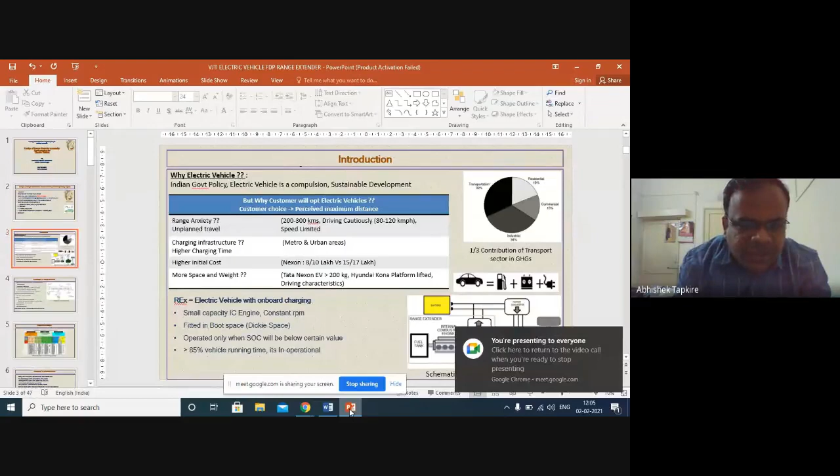Yeah, now the screen is visible. Presentation is visible. Yes sir, please make it large. Okay, now it is full screen. Yeah, it's good now. This symbol I am not getting. That's what I was confirming. Okay sir, so I will go to the first slide again.

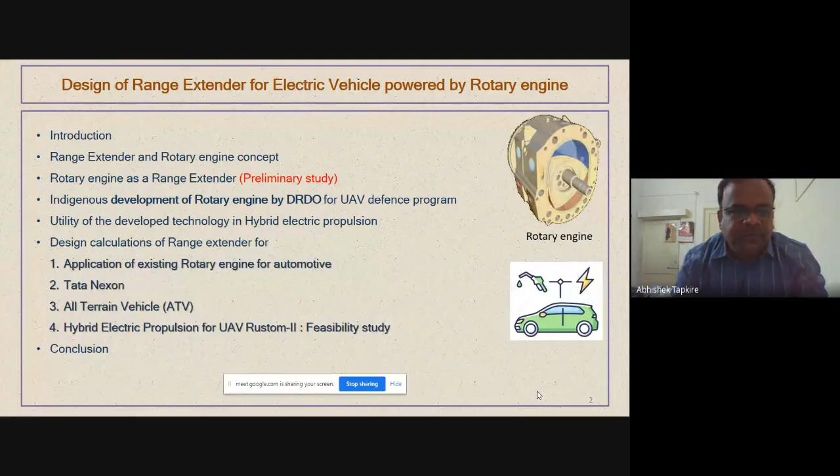These are the areas we are covering about development of rotary engine as a range extender in electric vehicle, and this is about the introduction portion which I already covered.

That range anxiety is why customers will opt for electric vehicle. The first one is about the range anxiety, and in case there is unplanned travel, the customer has somewhat apprehension about the electric vehicle.

The second, most important thing is about the charging infrastructure. The charging infrastructure currently in most developing nations is absent. Even in case of India, bidding and such things are going on, but the charging infrastructure is somewhat limited. Even the government is pursuing it very hard, but charging infrastructure currently is absent, and there is also a higher charging time.

And if you see about increasing the range of the vehicle, just like Tesla, they are going to near about 500-600 kilometers practically, or even more. In that case the initial cost of the vehicle is going to be somewhat high.

The reason behind is the battery cost is going to be very important, because in the electric vehicle near about 1/3 of the cost will be the battery cost. So if you are going for a higher range, the cost of the vehicle is going to increase.

Even in case of the Tata Nexon, the petrol and diesel version is available near about 8 to 10 lakh, while the electric version goes to near about 15 lakh. Even though we have a limited range in this area, if we go to increase the range, then battery cost is going to be very significant. That is going to be an issue.

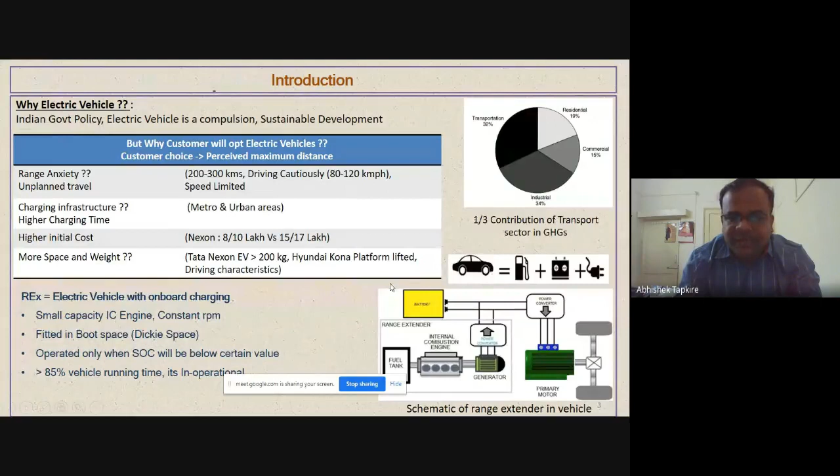The difference is, in a series hybrid vehicle there is no provision for external charging; here the plug-in charging will be there. Secondly, in a series hybrid electric vehicle the engine will be continuously on; here the engine will be on only when it is needed to increase the range of the vehicle. So we can say that fuel combination, battery combination, and external plug-in combination, all three will be available for the range extender configuration.

As I already told, it is a series configuration, so in this case we can limit the electric range of the vehicle. Suppose currently we are getting near about 200 to 250 kilometers of electric range. In that case, most customers will utilize this range, particularly in terms of personal cars.

Once or twice in a month, more than 150 kilometers of range will be utilized in a day. So what can be the alternative? Near about 125 to 150 kilometers of electric range can be given to the vehicle, and in case the vehicle range needs to be increased, suppose near about 300, 400 or 500 kilometers for a long journey, then after 150 kilometers this engine will be started, and it will charge the battery and supply it to the electric motor.

That will be electric drive. So most of the 85 to 90% of the time we are going to utilize the electric portion of the vehicle during its entire life course, and near about 10 to 15% of the time this range extender plus electric combination will be used.

The reason behind this is that there will be less dependency on the charging infrastructure, because we have the engine with us, and the customer's apprehension about range can be eliminated. Secondly, the cost of the vehicle can come down. Mahindra and Tata are also working on range extended electric vehicles to make this electric vehicle affordable in an economical segment.

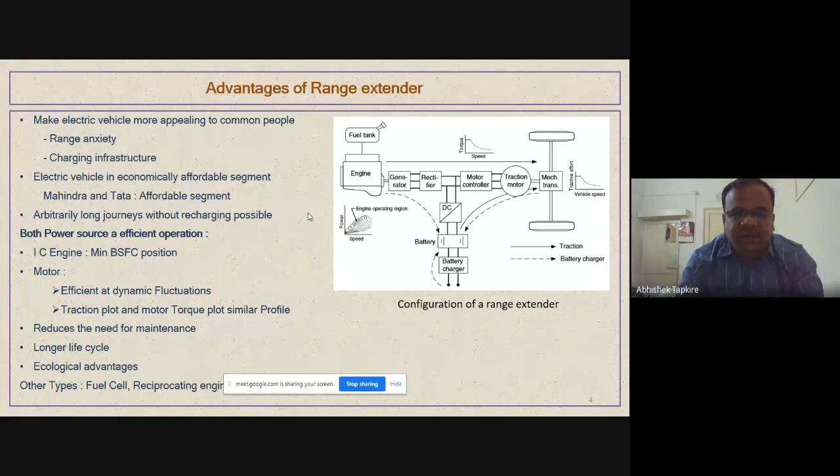Then there will be a reduced need for maintenance. Electric itself has lesser maintenance, and the engine will have lesser maintenance because its utilized life will be very less, giving a longer life cycle. It will have good ecological advantages, in terms of disposal of batteries, because a lesser battery capacity is required. Secondly, the engine will only be operated 10 to 15% of the time, considering customer characteristics for a personal vehicle, so we're getting the advantage both in terms of engine and electric vehicle side.

That is going to be very fine, but we have the disadvantage in terms of initial cost. So until the charging infrastructure is there, and until there's some good technological breakthrough in battery technology, the range extender is going to be a somewhat feasible option, considering the customer perspective, where it will be available in the economical range also, and we're getting the advantage of both electric and ICE engine benefits utilized in this range.

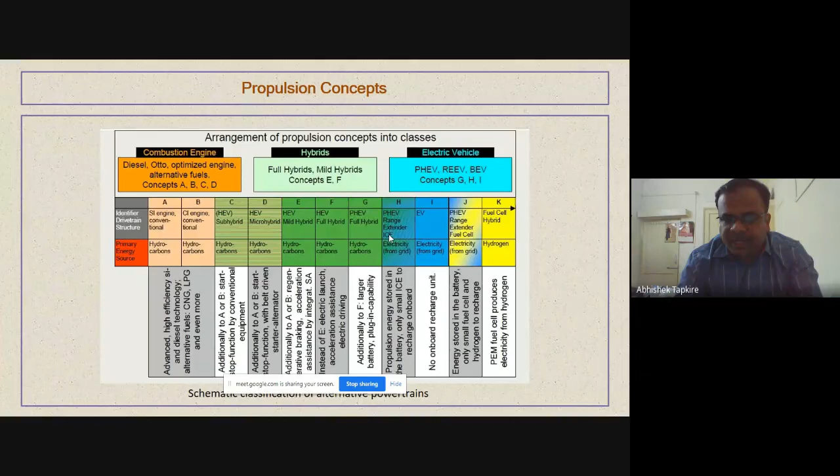So instead of directly going to the electric vehicle, the in-between range extender ICE engine option is available, where the plug-in option will be there and engine plus electric motor option will be there. Now we have seen the advantages of the range extender. What will be the limitations? We can say that it will be a lesser efficient mode because we are converting power twice.

But it will not be a very much lesser efficient, just like 35%, 30 to 35% in terms of ICE engine. The power plant propelling the vehicle, the sizing of the power plant will be decided by the vehicle.

Then increased running cost to some extent, because total in terms of 85% of the time the electric mode will be there, so we are getting the advantage of electric mileage. But when engine and electric both will be operating, in that case, at about 15% of the time the running cost will be somewhat on the higher side.

Then it is adding somewhat design complexity to the powertrain, even though it is going to be somewhat simple because we're adopting a series hybrid electric configuration. The maintenance and reliability aspects will be somewhat on the higher side because we're adding an engine, and the refueling has to be done at petrol stations and recharging at home or public charging. Both recharging and refueling we need to do.

But whatever the limitations are there in terms of range extender, the advantages are much more important, and the advantages outweigh the disadvantages.

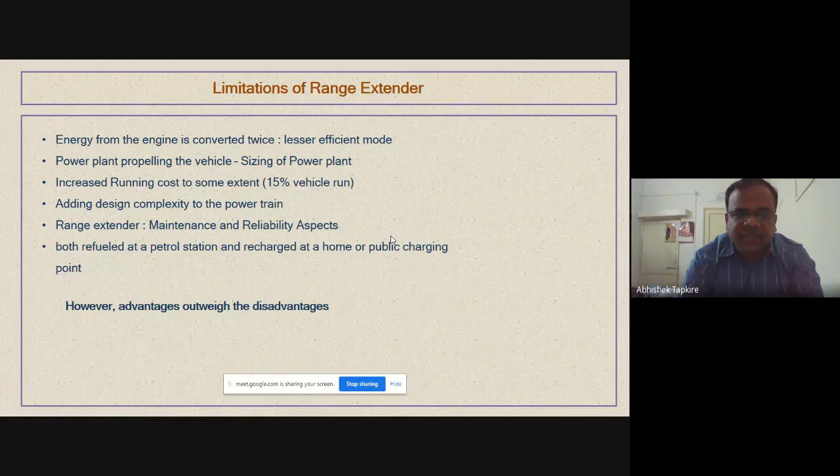If we see about the customer perspective, I already explained that generally the perceived maximum trip distance is going to be an important criteria. Suppose one person is staying near about 150, if you consider the example of Mumbai also, near about Pune, then near about distance is about 120 to 150 kilometers. If to-and-fro distance is there, 300 kilometers is going to be consumed within a day.

This condition is going to come once in 2 or 3 months, but it is affecting his purchase decision based on this perceived maximum trip distance, because charging infrastructure in between is not available.

Secondly, from the ecological perspective also, from the customer perspective point of view, if a range extender is there, then there will be a boost to electric vehicles, electric plus this range-extended vehicle, because in case he just wants to increase the range of the vehicle to near about 400 or 500 kilometers, that is going to be possible. And from the ecological perspective also, this is going to be important.

Then one more important thing is that the range extender has to be gasoline only, and there is more boost to the gasoline option currently, considering the emission point of view. The reason behind using the gasoline engine is the pollution limitation of the diesel vehicle.

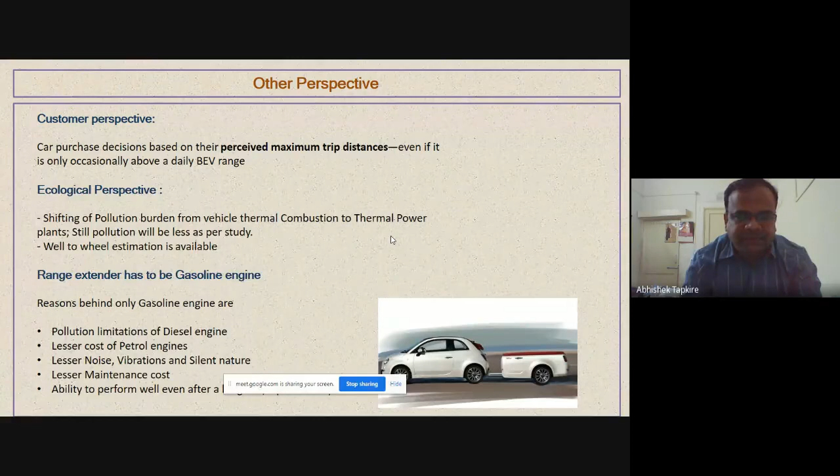Then what are the other options available is about the fuel cell. Fuel cell has the important advantage in terms of zero emission. Hydrogen has calorific value near about 3 times that of petrol and diesel, near about 1.2 lakh kilojoule per kg, and low weight, unlike a battery vehicle. But it has limitations currently in terms of technology, safety, storage, and availability of rare earth materials.

Reciprocating engine is also an important option as a range extender because of its high proven trust, and its 120 years of established technology. And this is about the trailer configuration.

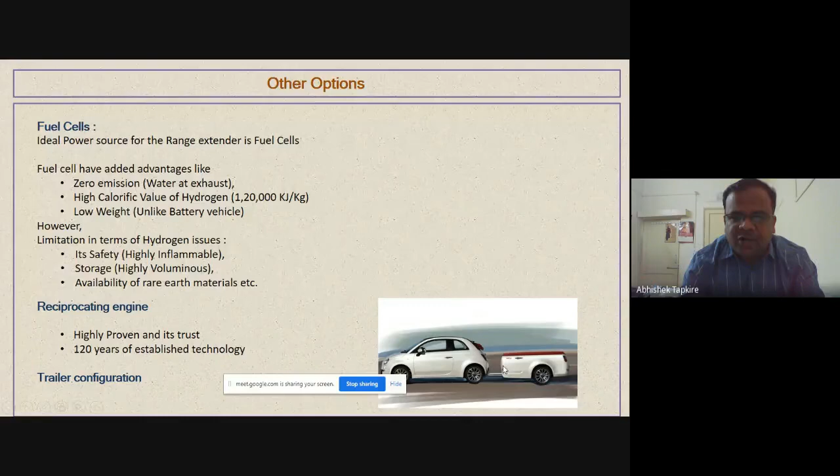If you see on the right side, such type of things are currently being tried in Europe, where the electric vehicle—this will be a pure electric vehicle—and in case the customer has to go to a higher range, particularly near about 400 or 500 kilometers, which is beyond the electric vehicle range, then such type of trailer configurations they are currently adopting, but this is not going to be very much feasible in the Indian scenario.

Sir, is my voice and all that coming through all right? Vijay, sir? Yes, sir. Yes, sir. Fine.

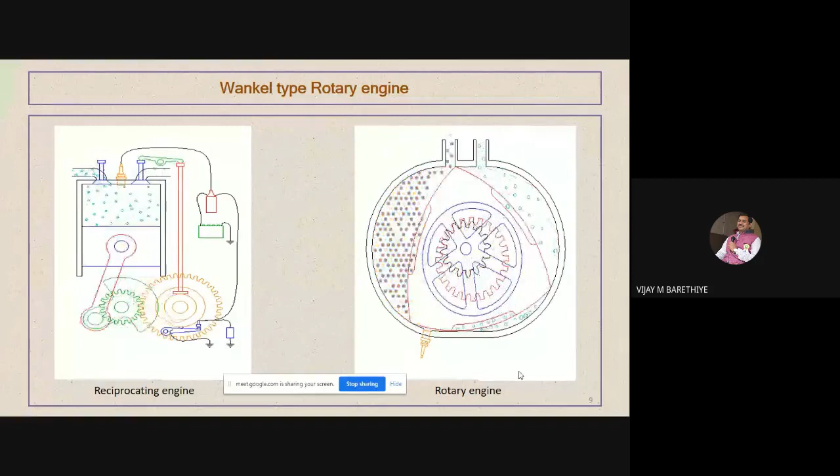Is any participant there? Jaipal Patil, sir. Thank you. Yeah, this animation is visible, right, sir?

Okay, this is the configuration of the Wankel type rotary engine. Here you can see this is a typical reciprocating 4-stroke engine, and this is a Wankel type rotary engine. The Wankel type rotary engine has a configuration where there is a triangular shaped rotor, and there is an epitrochoidal shaped housing.

This is an epitrochoid, and there is an internal epicyclic gear train. This internal epicyclic gear train has a 2:3 ratio, and it gives 1:3 output. That is, when there is 1 revolution of the rotor, there are 3 revolutions of the output shaft.

This is the area where suction takes place. Then there will be compression. Then the spark plug will fire at near about 18 degrees before top dead center. Then there will be an expansion stroke, and an exhaust stroke.

Here you can see that the complete thing is rotating. There is no conversion of reciprocating motion into rotary motion. Here directly the rotary motion is converted into rotary motion. So that has the advantage in terms of balancing, and also in terms of compactness, because the configuration itself is very compact.

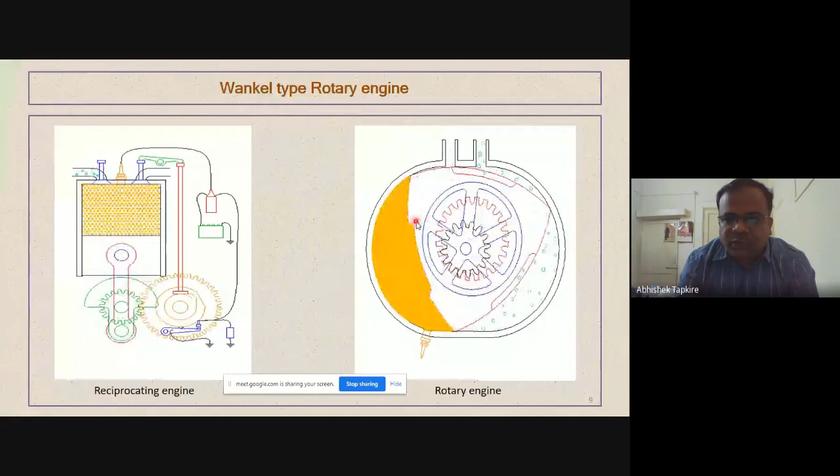Secondly, if there is 1 revolution of the rotor, there are 3 revolutions of the output shaft. You can say 3 revolutions of the output shaft is 360 multiplied by 3, which is near about 1080 degrees, and in this 1080 degrees, 4 strokes are taking place. So 1080 divided by 4 gives 270 degrees.

So each stroke in the rotary engine is about 270 degrees, whereas in the case of a 4-stroke engine, it is 180 degrees. So each stroke in the Wankel engine is 1.5 times larger compared to the 4-stroke engine.

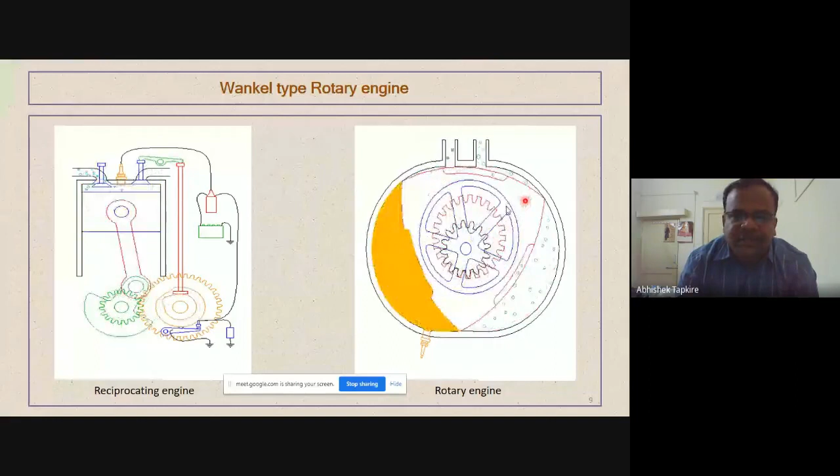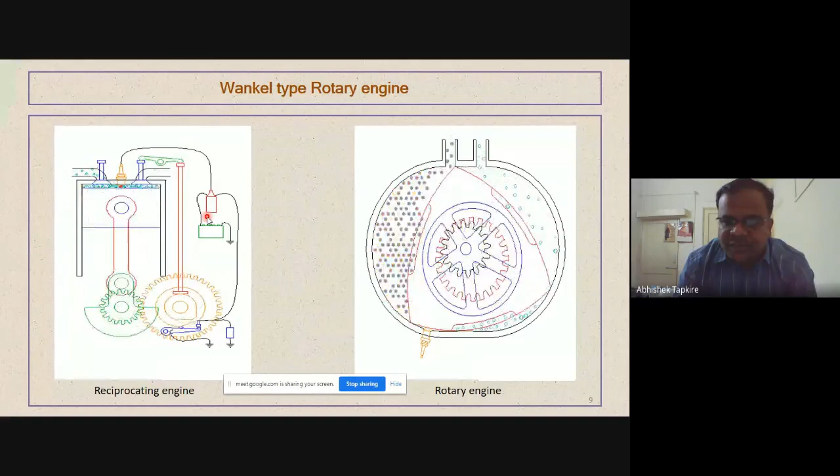So we're getting the advantage in terms of volumetric efficiency. Apart from that, we're getting the advantage in terms of torque fluctuations. So these are the important advantages of the Wankel engine.

Then, because of this mechanism itself, we're getting a high power to weight ratio. It has a low frontal area, so its specific weight is going to be very high, and specific volume is going to be very high.

Then it has lesser vibration and noise, because we're converting directly rotary into rotary motion. It has high volumetric efficiency, because as I already explained, each suction stroke is 1.5 times larger, so we're getting more time for induction of charge.

There will be smooth operation, and less complications. There is no valve train required as a port mechanism, which we currently use, and this is quite efficient also in the case of the Wankel engine.

Then the number of internal reciprocating parts is quite less compared to the reciprocating engine, so the power loss due to internal friction will be less. Then it is a gasoline engine, and it has silent operation.

So for long idle time operation, it is going to be very much useful. And I would like to say this technology is indigenously available with DRDO. DRDO has developed this technology for unmanned aerial vehicle applications.

There are 2 unmanned aerial vehicles of our Indian defense, that is UAV Nishant and UAV Panchi. For this UAV purpose, this technology has already been developed, and it has been delivered also for utility.

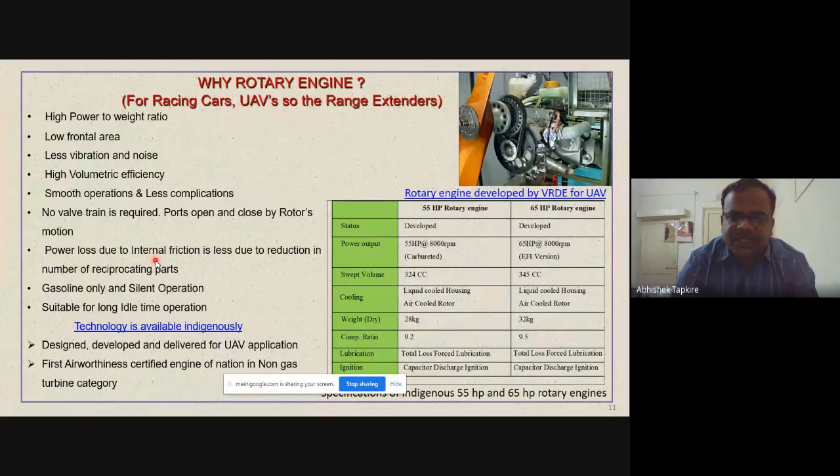And I would like to say this is the first airworthiness certified engine of the nation in the non-gas turbine category. In the gas turbine category, engines are available, but in the non-gas turbine category, this is the first airworthiness certified engine by the Center for Military Airworthiness Certification.

There is a regulatory body for Indian defense aero applications, that is CEMILAC, and this engine is certified by them.

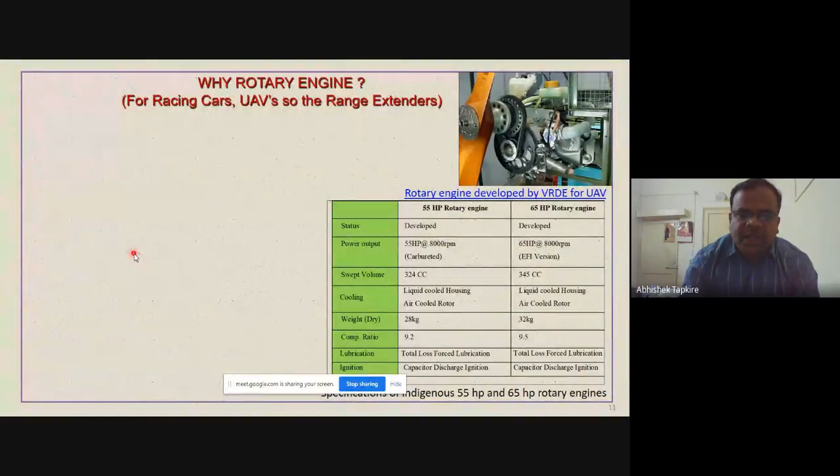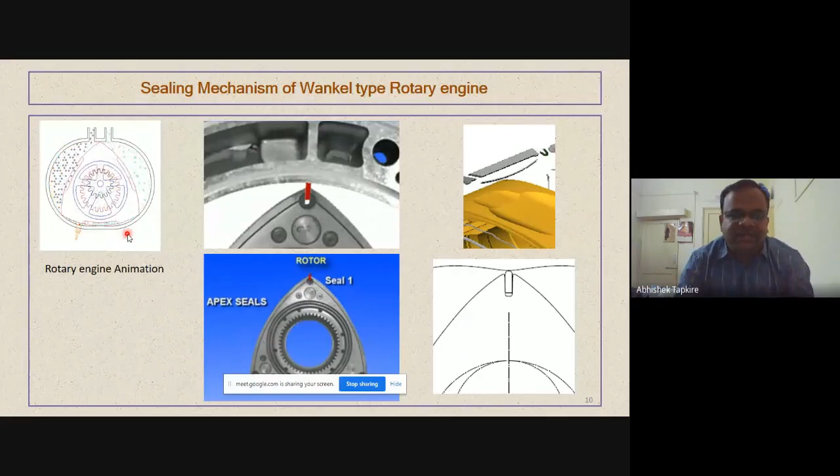There will be a separation of the chambers, so that different strokes take place simultaneously in different chambers. Here when there is suction, simultaneously expansion is going on, and combustion is going on, so different strokes are taking place simultaneously in different chambers.

The technology currently developed by DRDO has the capacity of 55 HP and 65 HP.

It is running at a higher RPM, that is 8000 RPM. It's a one carburetor version, and an electronic fuel injection version is also available with us. Its cooling, if you see, is liquid plus air cooling. Both are available - the housings are liquid cooled and the internal portion is air cooled.

If you see about the weight, particularly the weight, I told about the power to weight ratio. Its weight, if you see, near about 55 HP engine is having 28 kg dry weight, and 65 HP engine is having 32 kg of weight. So about 0.5 kilogram per horsepower we are getting, which is quite an important advantage as a range extender electric vehicle, because we require higher specific power - its weight has to be low and its volume also has to be low, while we should get higher horsepower also.

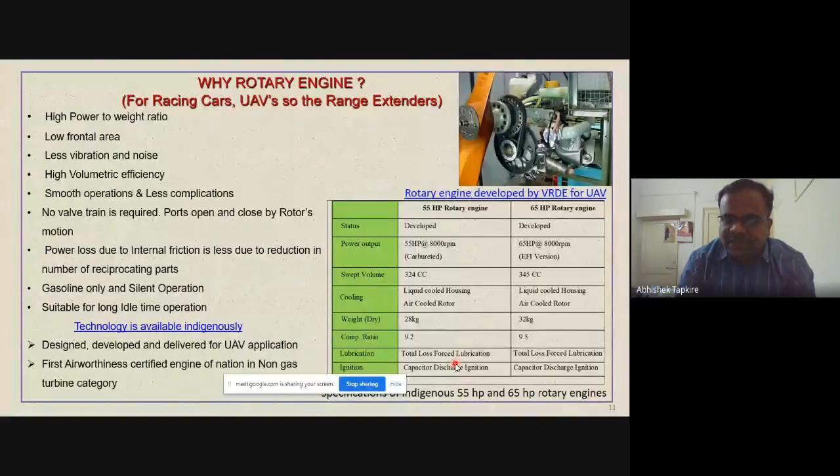So that's the compression ratio. The compression ratio is 9.2, 9.5. It's a gasoline engine. We have used a total loss forced lubrication system and CDI ignition system in this engine.

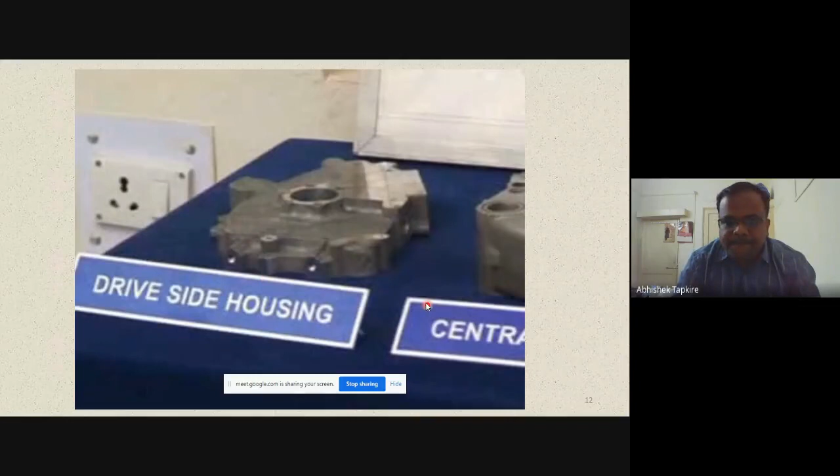So this is about the presentation. Yeah, this video is there. Now I think I would like to show the video at a later stage, because it's in presentation mode and I think it's not running. No issue - regarding the development of the vehicle engine, I would try to run the video at the end.

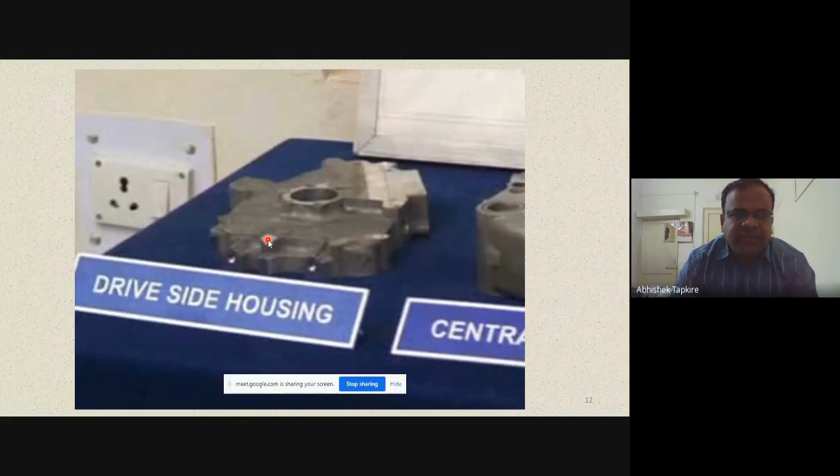The engines currently we have developed, we have also given to the UAV application. There are flight trials, high altitude trials, and other trials also we have done. It's a proven technology in terms of UAV, and the same technology can have an important utility in the range extender. So now the feasibility study was carried out.

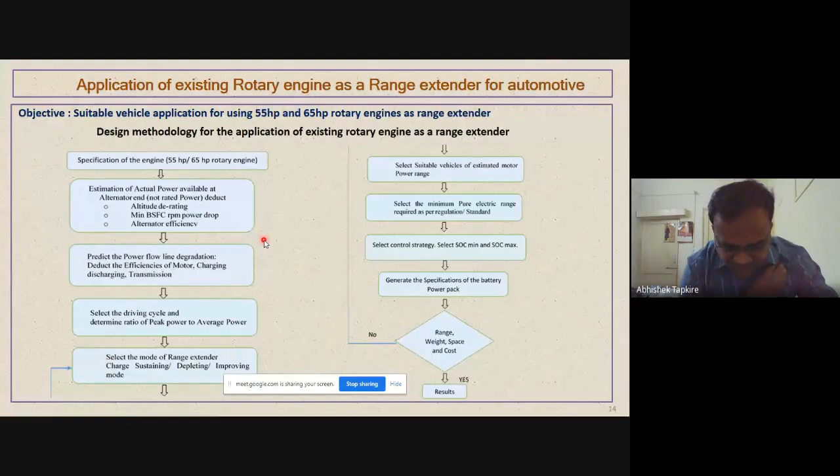Sir, what's the time available to me? It's about 1:15, right sir? Yes sir, 1:15. Okay, then the application of existing rotary engine as a range extender for automotive purpose.

Currently the engine which is available with us is 65 horsepower. And if you want to utilize this engine, then which application, which range of vehicle will be suitable for it as a range extender - that I'm going to explain here.

The first one is about the specification of what will be the design methodology for this - if the existing engine is available, and you want to utilize it for the purpose of automotive application, electric automotive application as a range extender, then what will be the methodology - that I'm going to explain.

First is about the specification of the engine. It's clear to us that 55 and 65 horsepower engines are available. So first of all, we have to estimate the actual power available at the alternator end. When the engine is available with us, we are connecting the alternator to the engine, and we need to consider what power will be available at the alternator end.

Three important things are there. First is about altitude derating - with respect to altitude, there will be some derating. Then we can't run the engine at max power, as we have to run it at the minimum BSFC position, and there will be alternator efficiencies there. Then what will be the power flow line degradation - that is, the efficiencies in terms of motor, charging, discharging, and transmission. Then we need to predict the power flow degradation.

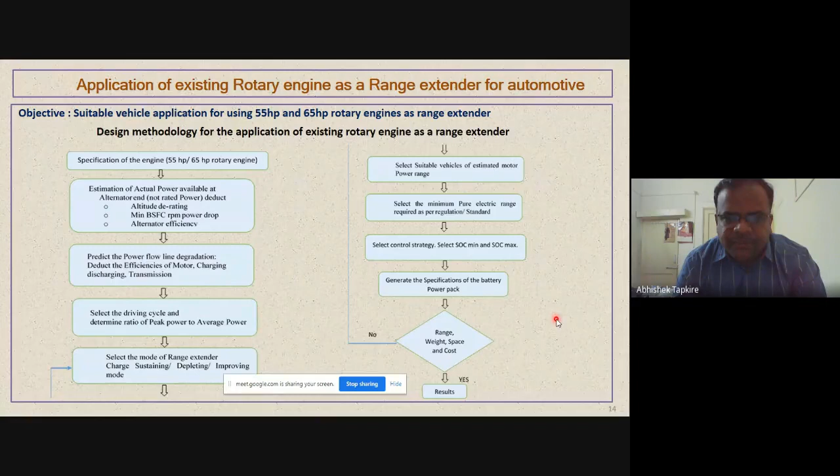The first step is calculating the engine rated power. Whatever 55 or 65 horsepower I mentioned, that is the engine rated power. And we need to determine what power will be available at the alternator end.

Secondly, in the minimum BSFC region, we get maximum combustion efficiency, high volumetric efficiency, and friction is also on the lower side. So these are the important advantages we get from the engine at minimum BSFC RPM.

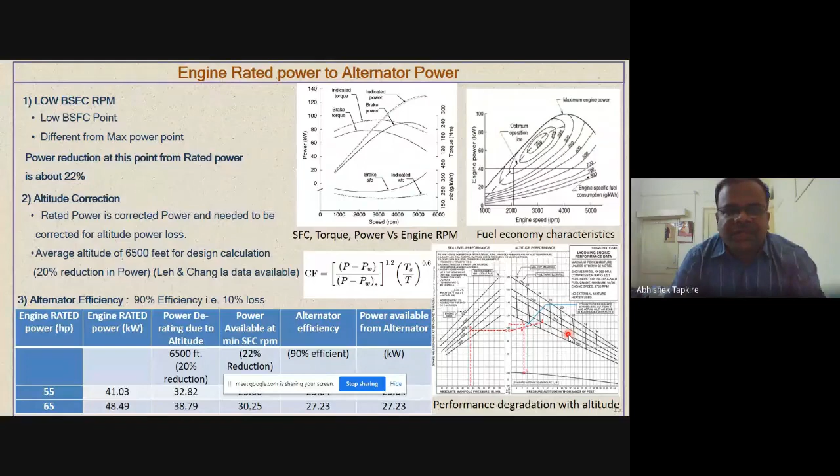And this is data of Lycoming that there will be a power degradation with respect to altitude, and near about 2.5 to 3% will be the power degradation. So we have calculated the rated power at the alternator end. Secondly, about the rated power at altitude correction, minimum BSFC power we considered.

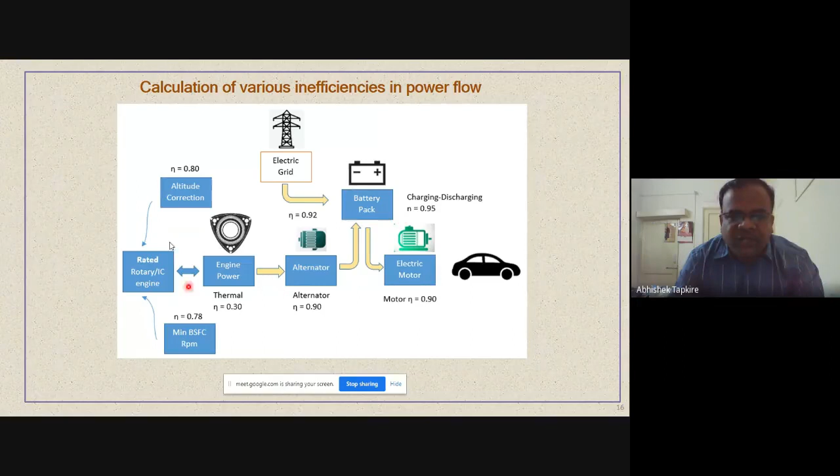The thermal efficiency of the engine is 30%. The power available we can say we are getting here. Then there will be a battery pack, and the alternator supplies the battery pack. There will be charging and discharging efficiency. Again, there will be a separate plug-in hybrid plug-in option also available. When the vehicle charging will be there, it's about near 92% we can see. And motor efficiency also we need to consider, which is about 90%. So that near about 90% has been considered. So this is a complete power flow line that we need to consider, and the losses in the power flow line have been considered here.

Secondly, I already told that when there is a 100 HP engine in some automotive IC engine, conventional IC engine vehicle, the range extender capacity is going to be very low. The reason behind this is explained in this slide.

First, if we see about the load power, this is the load power, and with respect to time the vehicle will run with the load power. This is going to be a characteristic. But there are two components of that load power: one is the average power, and second is the dynamic or transient element, that is the dynamic power. This average power and dynamic power together we consider the load power.

Out of these two elements, the average power will be supplied by the range extender. However, the dynamic power will be supplied by the battery. So there is an important advantage that we're having a battery, and this battery is an important energy reservoir. When there is a transient response, when there is a higher power requirement, that will be catered from the battery side, and the average power requirement will be fulfilled from the range extender.

So in terms of load power, whatever we have seen, in about 100 or 120, 130 HP engines which are available in our vehicles, they are designed for this peak power in the load power range. Because of this peak power, we have to go for a bigger engine. However, the range extender has to supply only the average power, so a low capacity engine will be there, and for a temporary or transient period when we require higher power, that will come from the battery.

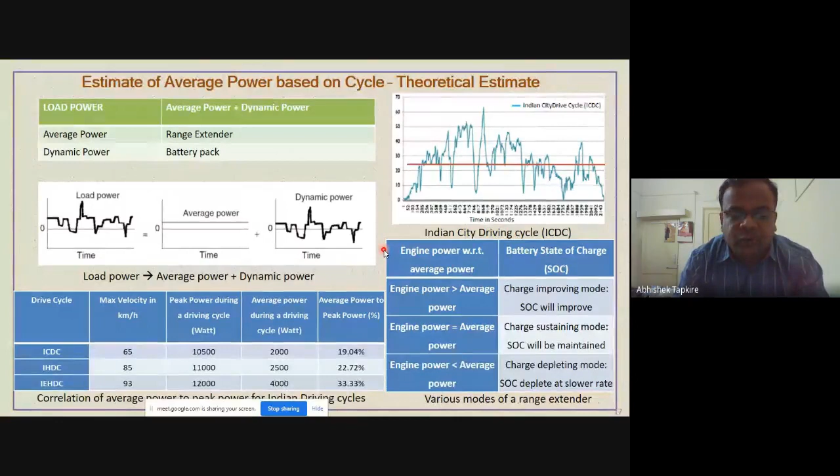Now this is a theoretical estimation. We can see that near about 22 to 33% will be the range extender power.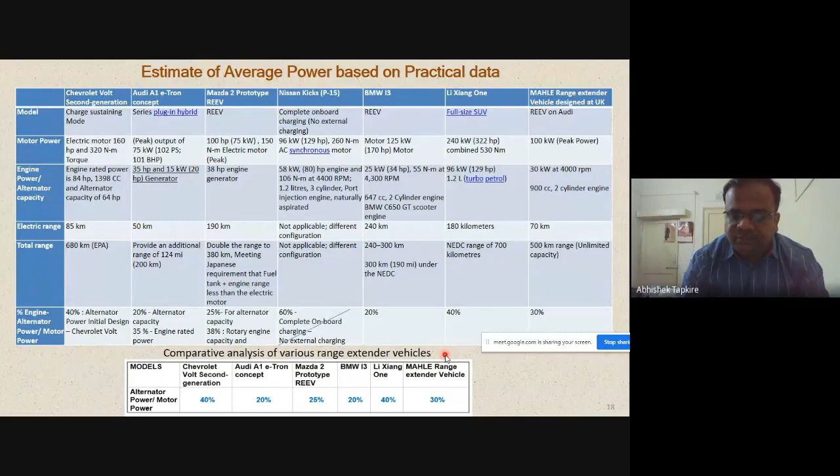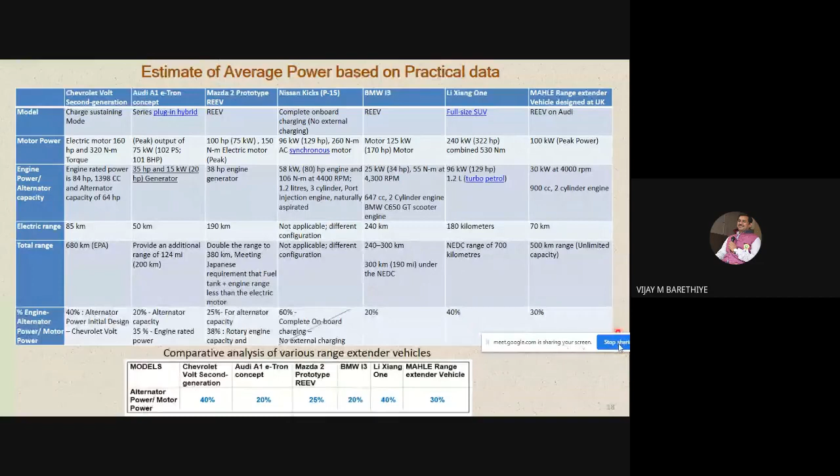It's going to hang, I think. There is a lag, sir. You can stop the presentation and then do it again. Yeah.

This is the next slide. Here again, some calculations I have shown that a 55 horsepower engine is there. Rated power in terms of kilowatt is calculated. We need to consider altitude derating, minimum BSFC, and alternator efficiency.

Then we need to consider charging and discharging efficiency from the battery, motor efficiency, and calculate the power available at the alternator end. If this power available at the alternator end is about 23 kilowatt and 27 kilowatt for both configurations, then it will be suitable for near about 125 horsepower of vehicle in a charge depleting mode.

This 55 horsepower engine will be suitable in charge depleting mode and charge sustaining mode for this power range of vehicle. And if you go for a 65 horsepower engine, it will be suitable for 120 to 145, in different modes - charge sustaining range and charge depleting range. So this is the range.

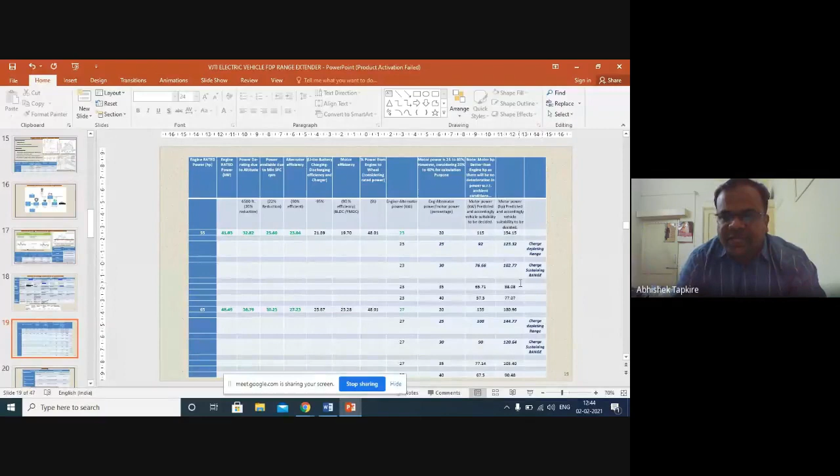If you see about, sir, 120 - please, can you make it full screen? Full screen? Yeah, is it okay now?

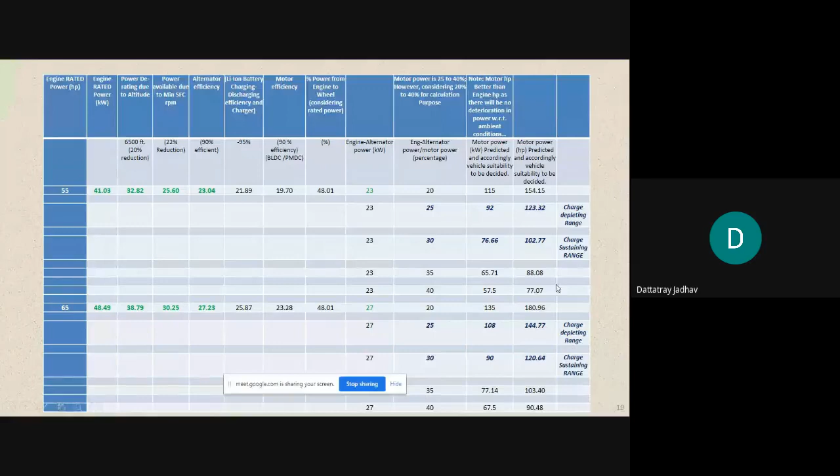It will be suitable in charge depleting range and charge sustaining range for different capacities of the vehicle. So fairly we can see near about 120 to 130, say 120 horsepower of engine in charge depleting range, 55 horsepower is suitable, while 65 horsepower engine will be suitable in charge sustaining range.

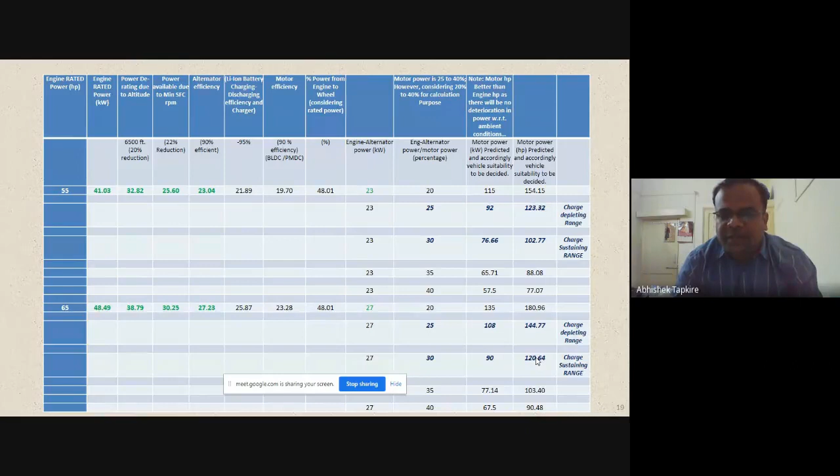For this range of 120, this is a similar range of Tata Nexon. So I consider the example of Tata Nexon here, and I just want to make sure that from the first principle point of view, whether these calculations are correct or not.

So this is the conclusion from the initial primary calculation: for near about 25 to 30% range, the 25% range will be the charge depleting range, and the 30% will be the charge sustaining range. And this is the power capacity where it will be somewhat suitable. This 120 to 125 horsepower capacity is the capacity which is closer to the Tata Nexon.

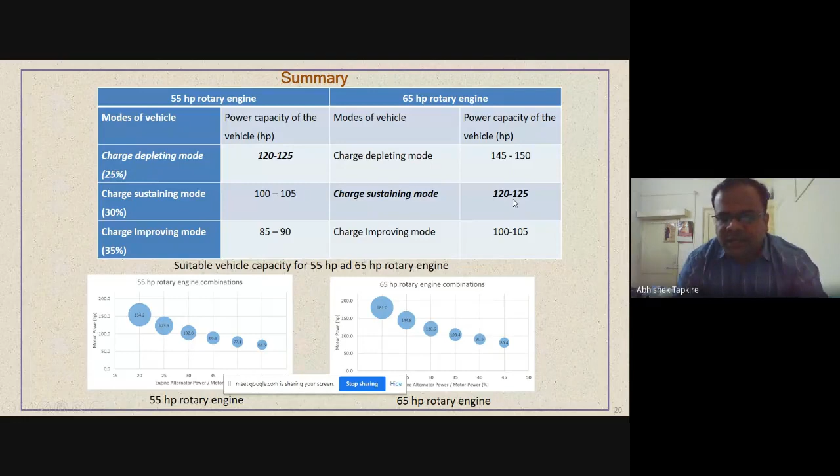So now my next calculation I had done for the Tata Nexon. Why I took an example of Tata Nexon: first of all, it is an indigenous vehicle. That is a thing of pride for us, and it is a vehicle which has dominated the electric vehicle market.

The attempt by Tata in terms of electric vehicle with Tata Nexon is a really important milestone in this complete electric vehicle journey. First of all, it is an indigenous product, and secondly, the electric vehicle and the conventional fuel, that is petrol and diesel vehicle, both are available in Tata Nexon, so it's easy for me from the technical point of view to compare the data with the conventional vehicle.

But the initial calculations that were done show about 25 to 40%, which is a wide range, because 25 to 40% itself is a wide range, and this ratio will change. There will be a ratio variation as per different parameters, just like vehicle variables.

In terms of vehicle variables, this ratio will change if vehicle mass is on a higher side, if the vehicle is on a lighter side, its capacity, then the other weights in the complete weight of the vehicle, then loading capacity and other things are there. This ratio will change.

Second is about the driving cycle. If we are going for a European driving cycle, Indian driving cycle, or US federal driving cycle, then in that case there will be a change in the variation. There will be a variation in this range.

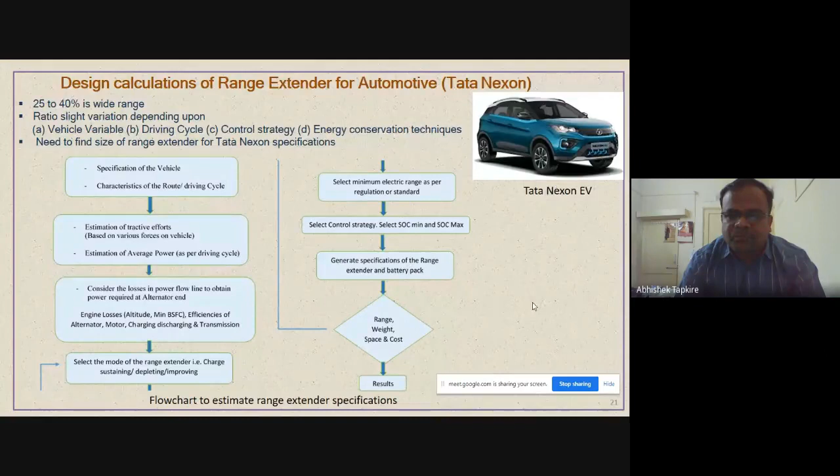Now in this case, I considered on-off control strategy. That is, the on-off control strategy has been used where when the charge is at a higher line, suppose 30 to 80%, we are considering 80% as the state of charge of the battery. From the charging point of view, if you consider, suppose at 80%, the engine will be in off condition.

If the battery is degraded from 80% to 30%, then the engine will be started and the vehicle will run continuously. The power requirement from the vehicle will be fulfilled. Apart from that, if the engine has higher capacity, there will be charging of the vehicle up to 80% again, and then the engine will be off again, and there will be a discharging cycle. So this is the on-off control strategy, also known as the thermostat control strategy, based on the principle of thermostat, that is, the on-off principle.

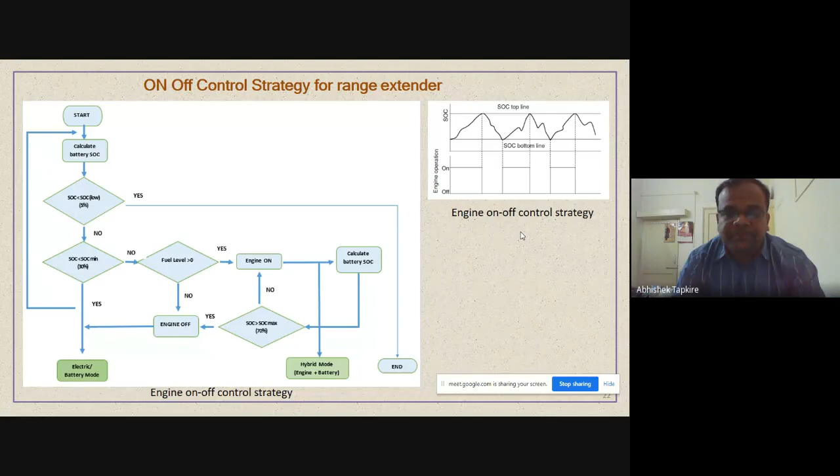Now the vehicle dynamic model has been considered here to calculate the various tractive efforts. First is the aerodynamic resistance. Then second is the rolling resistance and grading resistance to be calculated. And most importantly, the acceleration resistance to be calculated. All these resistances are calculated, then the summation gives the force on the vehicle, and the power of the vehicle will be the force on the vehicle multiplied by V.

Here, the aerodynamic resistance is important at higher speeds, because there is a V-square ratio, and apart from that there is the velocity of the vehicle, so it becomes a cubic curve. So aerodynamic resistance is going to be very important.

Then if the power of the vehicle is calculated, the range extender capacity can be calculated. Range extender capacity will be the power of the vehicle divided by the efficiency of transmission, motor, and charging-discharging efficiency — deducting these, we get the power of the range extender.

To calculate this average power, the first important thing is calculating the average power. There are two strategies adopted. First is directly from the cycle we can calculate the average power — for that, a MATLAB simulation model is generated, and from the MATLAB simulation model, by giving various inputs and parameters directly from the cycle, we can calculate the exact average power for the vehicle. The second strategy is simpler: the average power should be greater than the power for max constant highway speed of the vehicle.

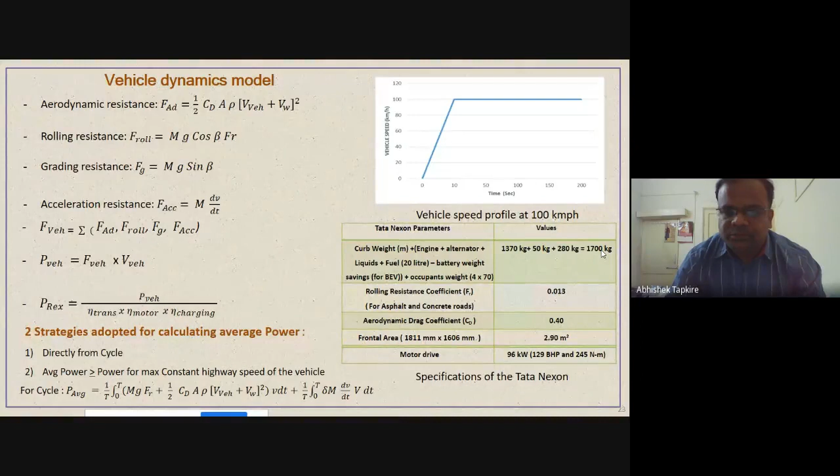In that case we are getting a charge sustaining range. Near about 25% will be the charge depleting range, and 30% we can consider as near about the charge sustaining range. If we're going for 35%, then it will be charge improving mode. It's not only about 100 kmph - if the vehicle is going at near about 42 kmph, near about 5-degree gradient can also be achieved. For the same tractive effort, if instead of 100 kmph we run the vehicle at near about 40-45 kmph, the 5-degree gradient is also achieved with the same range extender power.

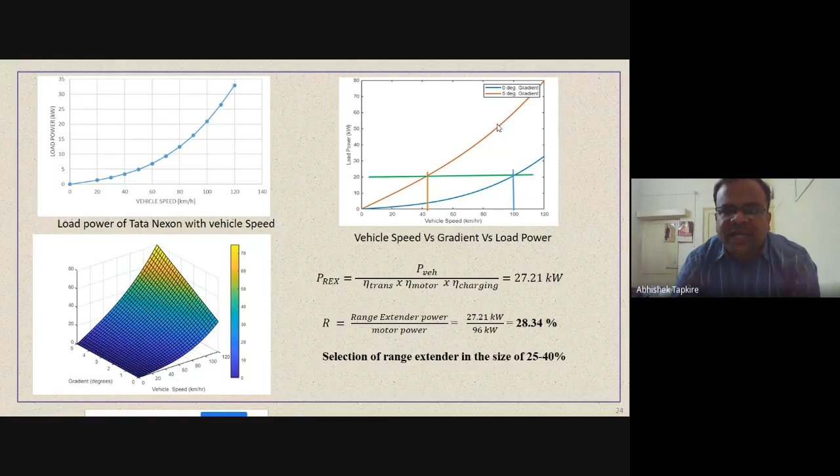Yeah, this is a summary of the results. It is the same thing which I explained.

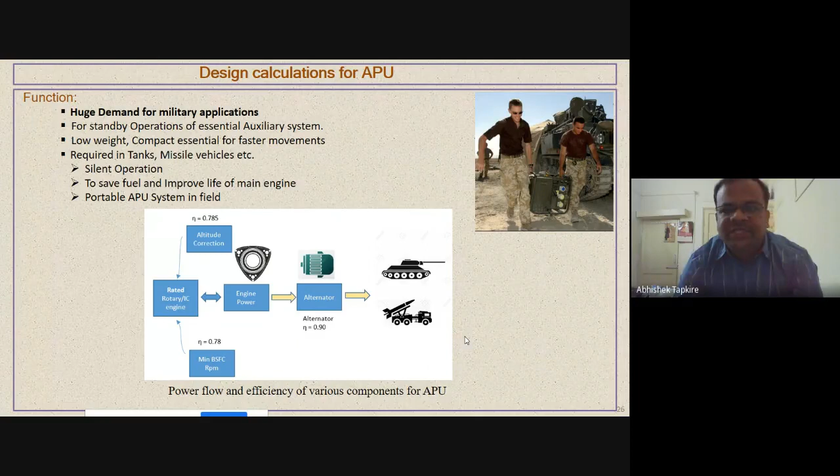Second, this application is also having importance in terms of auxiliary power unit, which is required for defense application. There is a huge demand, and for the same engine, if we want to go for an auxiliary power unit for any defense application, then the calculation will be on the similar side. For that engine we need to consider the corrections in terms of minimum BSFC altitude, and in terms of alternator losses. We can develop an auxiliary power unit for the defense application. I would like to quote that the engine has the important advantage in terms of weight and volume. So from the defense point of view, when there is a constraint of weight and a constraint of volume, this application is going to be very important from the APU point of view.

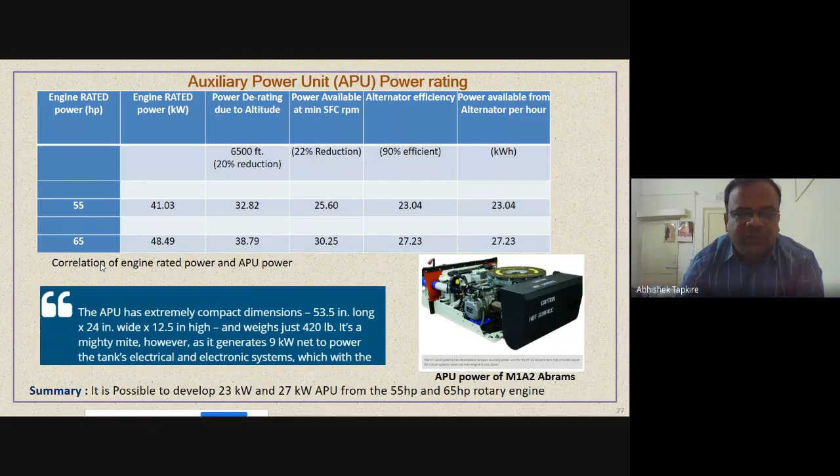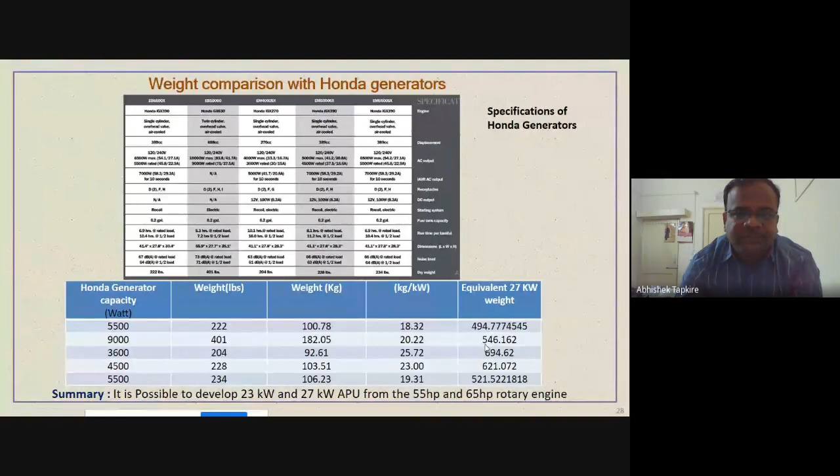The second other important application, although it is not from the electric automotive vehicle point of view, but from the electric unmanned aerial vehicle point of view, I would like to explain within 5 or 10 minutes, that if we use this concept of range extender of electric vehicle, or this vehicle engine concept, which is a hybrid electric propulsion, a series hybrid electric propulsion, we have to use it for the aircraft UAV application, unmanned aerial vehicle application.

What should be the approach for it? That I'm going to explain now.

For this thing, the hybrid electric propulsion for the UAV is going to be very much important, because whatever advantages we are getting in terms of automotive application for electric vehicle development, in terms of battery, electric motors, alternators, generators, whatever developments are going on...

...this field of aerodynamics is also going to be very much affected. There are experiments from Siemens, even from Airbus, Siemens, and many other European and US players for development of hybrid electric propulsion.

For that, we need to see whether the same concept can be used for the UAV purpose. It has the important advantage in terms of high reliability for the power source and propeller. Currently, the propeller and power source have to be at a single place. Here we can give multiple places, and we can increase the aerodynamic efficiency.

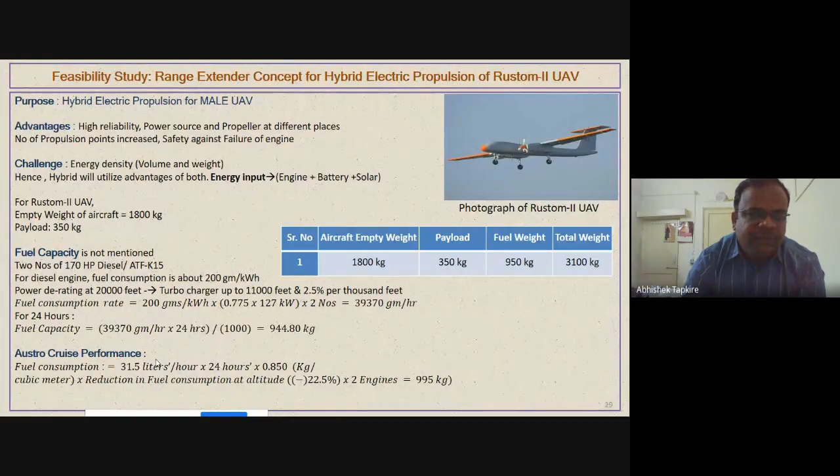The important challenge for this is energy density. Here, the approach I consider: the fuel capacity has been calculated, and based on the Austro engine's current performance, whatever engine they are using, based on that fuel capacity, the energy input for the aircraft is calculated.

Considering the thermal efficiency, currently they use a diesel engine with a thermal efficiency of 30%. So whatever energy input is there has been calculated.

Here, as we logically go, the battery has important limitations in terms of weight, so I consider hybrid propulsion — that is, solar plus battery electric configuration plus a range extender.

Here, the solar energy available for the fuselage and other areas has been calculated, along with the solar power available throughout the cycle of this UAV. The UAV has an endurance of 24 hours.

There are about 12 hours of solar energy available. So solar power available from the UAV's point of view has been calculated, along with other inefficiencies in the power flow line.

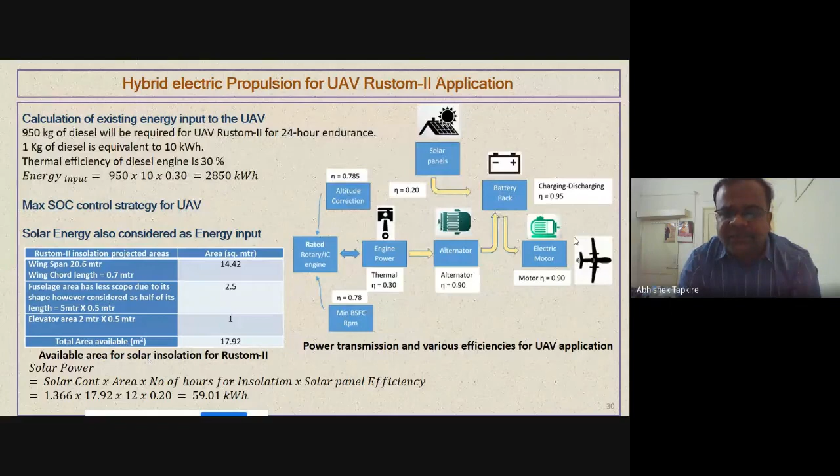So, these are tentative calculations. I just want to convey that the power, if using a range extender from 55 horsepower to 240 horsepower, fulfills the need in the range of 16% to 73%.

And if you consider solar power, it fulfills the need by only about 1.86%, near about 2%.

So the other power requirement has to be met from the battery side. If you consider even Tesla's current lithium-ion specific weight of battery, there will be a huge battery capacity required. For that, I calculated the weight.

The weight will be very huge, near about 3,000 kg to near about 10,000 kg. So that is not feasible in terms of using battery plus range extender at this capacity.

Because the aircraft weight itself is 3.1 ton, and we require a battery of 3.1 ton to 10 ton to cater to this electric requirement.

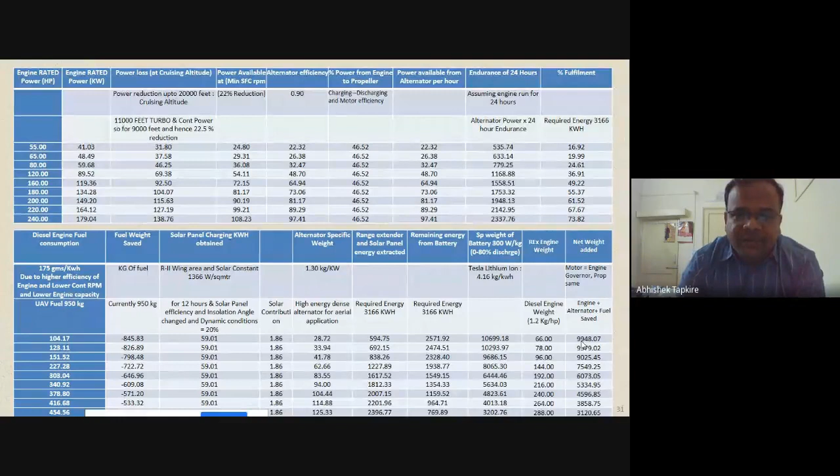So the alternative is to reduce the endurance of the hybrid electric UAV. That is, instead of 24 hours, I have done iterations for 12 hours and 8 hours, considering from 55 horsepower to 280 horsepower.

We can see that if we are reducing the endurance, then at about 260 to 280 horsepower, there will be a weight penalty of less than about 500 kg. So in order to make this hybrid propulsion feasible at the current technological level, we need to go for about 260 to 280 horsepower of range extender with reduced endurance.

Here, the important point we need to consider is that the cycle effect has not been considered. The average power to peak power ratio is not included here.

In case of automotive, the average power to peak power ratio we calculated is about 30%, but for unmanned aerial vehicles or aerial applications, it's near about 70 to 80%, because UAVs run continuously between average power and max power, which is not the case with automotive. In automotive, we generally run at lower RPM only, but in aircraft, we run at higher RPM most of the time.

So that cycle effect was not considered, but if near about 25% cycle effect is considered, then this calculation can be refined.

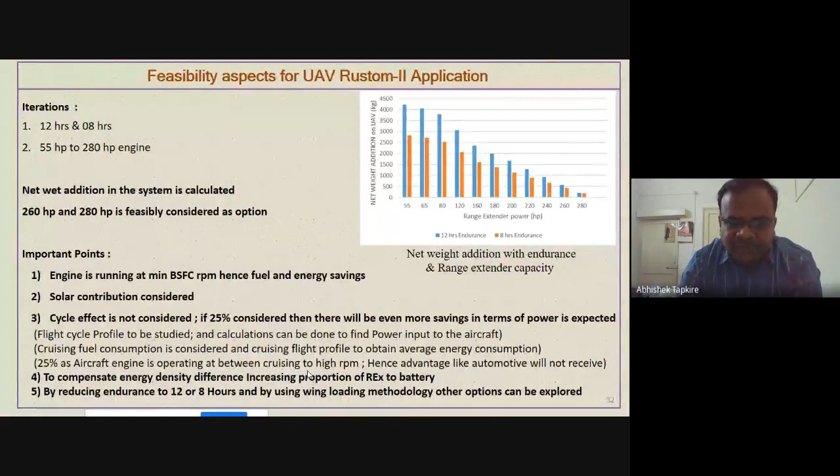So what other options are available to us? Apart from reducing endurance and increasing the range extender size, the wing loading methodology can also be considered.

Wing loading is nothing but here, the mass of the UAV and the area of the UAV are considered, and if you compare lift force and wing loading, we get different parameters. Using these parameters, the wing loading for current UAV applications can be calculated.

We only need to keep this wing loading constant, while other parameters can change. So if we reduce the mass of the aircraft to some extent, this wing loading can be maintained, or by increasing the wing area and reducing the aircraft speed to some extent - just like in Tata Nexon, where conventional vehicles have a maximum speed near about 150, 180 kmph.

While for electric vehicles, they have limited the speed to 120 kmph. Similarly, in aircraft, if you limit the speed, then you can go for a lesser wing loading, and optimizing the wing profile also needs to be considered.

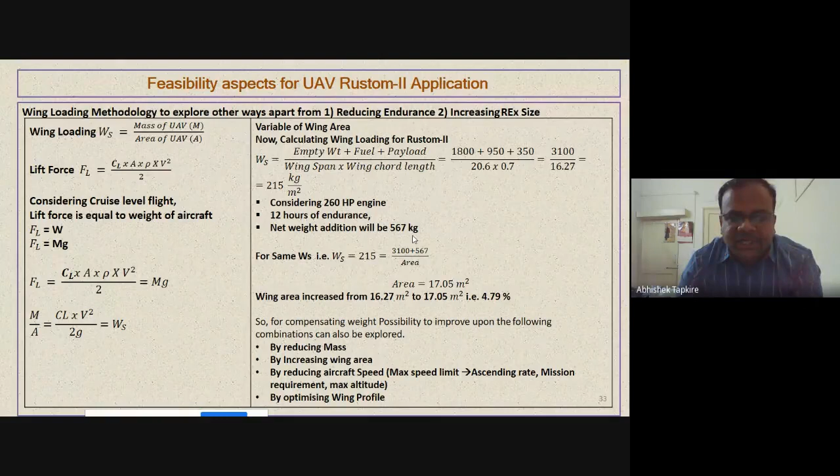Suppose the wing loading is considered near about 5% only - then for the same wing loading, wing area can be increased by near about 5%, and the additional weight of near about 500 to 600 kg for the increased range extender size can be catered for.

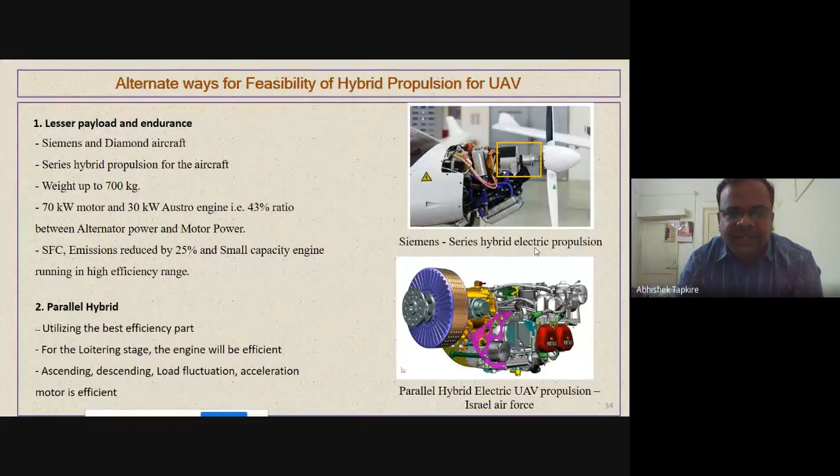There are some experiments by Siemens for series hybrid electric propulsion, and some Israeli Air Force applications for hybrid electric propulsion. Such experiments are also being carried out, having the same electric series range extender concept applicable just like electric vehicles.

Then, for development of an alternator, currently the 23-27 kilowatt alternator size we mentioned - off-the-shelf alternators are also available from some manufacturers. If you go for indigenous development of the alternator, that option can also be opted for.

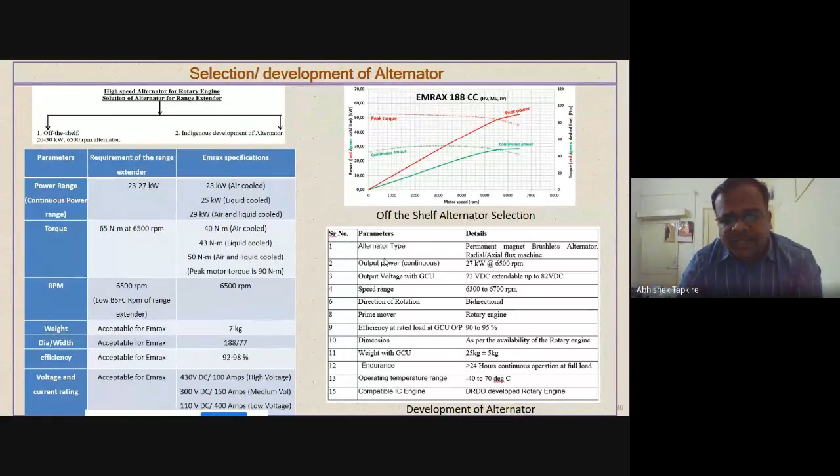For that, as I told initially, the minimum BSFC RPM has to be tuned. As I mentioned, the 65 horsepower electronic fuel injection EFI engine has its maps and all those details available with us.

The engine mapping was carried out for the minimum BSFC RPM, with maximum power available at 6,500 RPM, and minimum fuel consumption with respect to various parameters like manifold absolute pressure, temperature, exhaust gases, air-fuel ratio or lambda ratio - considering all these parameters, we can find a particular point where we get maximum horsepower with lesser fuel consumption.

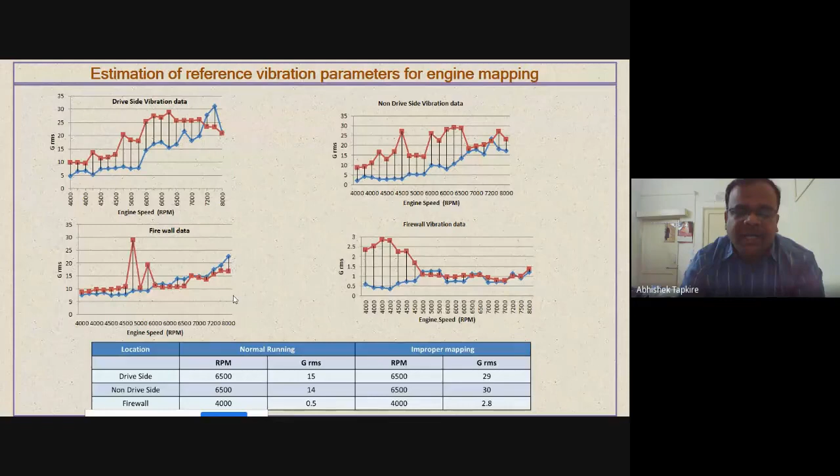So the vibration analysis and all those things at the current rate we have calculated, the FFT analysis were calculated, and based on that, the engine mapping when we are carrying out has to be checked, and the vibration and all those things has to be within that limit only.

So currently this is only the feasibility study. Preliminary study is carried out from my organization's point of view. Now the next step is to go for practical experiments, to prove this concept. This is the initial feasible calculations, preliminary calculations that were carried out.

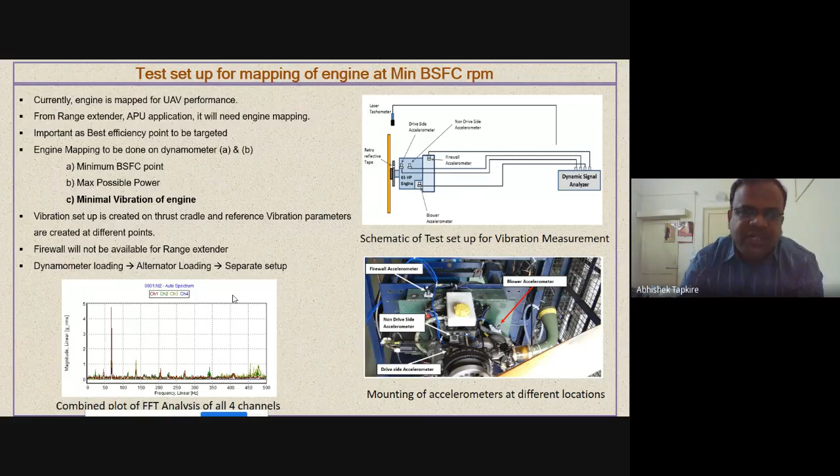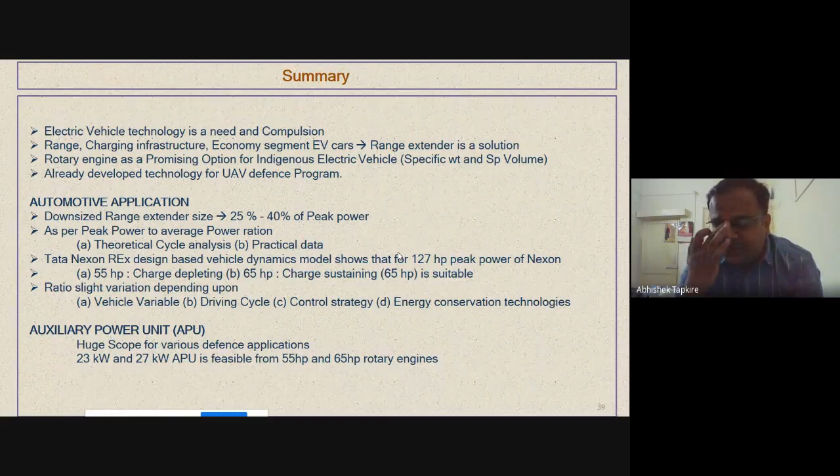I just want to summarize our talk, that the electric vehicle is going to be very important, but because of its range anxiety and the charging infrastructure limitations, we have to go for a range extender. This range extender will reinstate confidence in the electric vehicle, and it will reduce the cost of the electric vehicle, and secondly the range anxiety can be eliminated until the charging infrastructure is available or some important breakthrough in battery technology happens. So this can be a feasible alternative for the automotive industry.

We already see that near about 25 to 40%, 25 to 30% will be the size of the range extender, which will be a very small size. Even Tata and Mahindra are telling that it will be near about a two-wheeler engine that can be fitted, not at the backside of some of the vehicles, which will run the four-wheeler itself, so that the range extender will be on the lower side, and there will be a slight variation based on all the parameters, and for any particular vehicle that can be calculated.

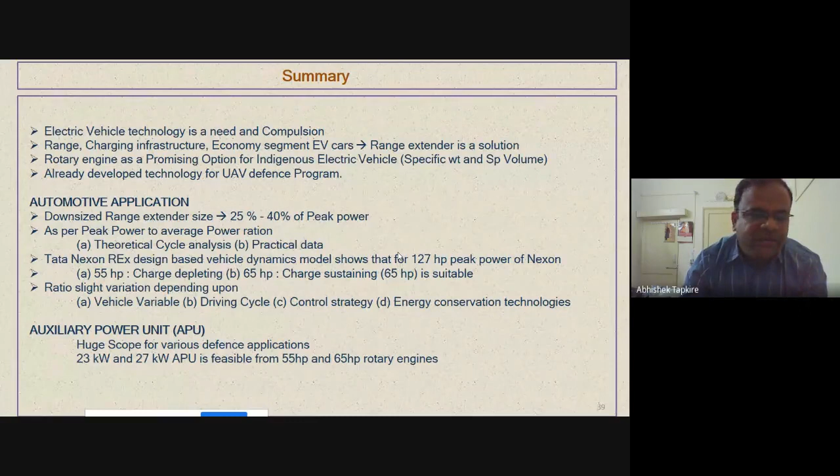It's having important advantages in terms of APU, auxiliary power unit, and in terms of hybrid propulsion also. We can see there is feasibility by compromising some parameters in terms of endurance, wing loading, by keeping the same wing loading, and other things.

Then, alternative selection - I would like to convey that this is a similar concept, so it is not only limited to the Wankel engine. Wankel engine has the important advantage in terms of power to weight ratio and specific volume. It can be applicable for any other range extender application, just like for fuel cell or micro turbines, or in case of a reciprocating engine, a similar concept can be used and made feasible.